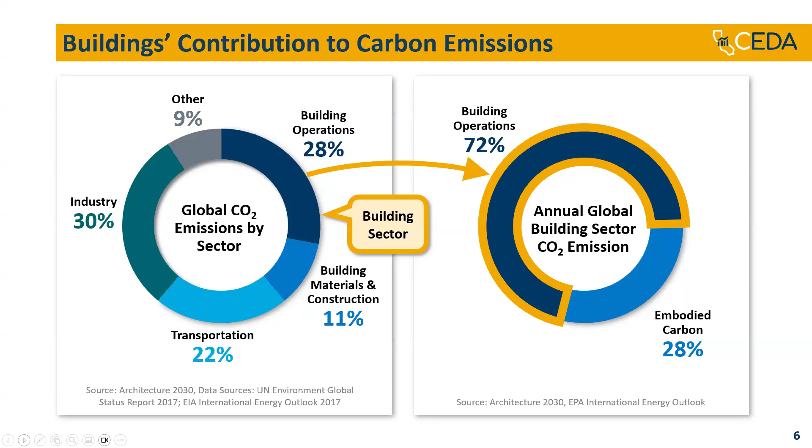So again, why are we focused on buildings with high operating carbon? Well, these buildings will unfortunately slow the transition to clean energy. They're far less adaptable and resilient, causing faster depreciation and decreased profits. They're vulnerable to future policy changes, and they have a greater potential to someday become a stranded asset.

So cities are starting to face a number of significant challenges as they try to improve energy efficiency and implement new sustainability measures. Budget constraints often limit their ability to invest in those new technologies or upgrade aging infrastructure. Many cities also struggle with capacity issues. There's simply not enough staff or resources to manage large-scale projects. Aging building stock presents yet another hurdle, as retrofitting older buildings can be complex and costly.

And then finally, cities are forced to juggle competing priorities, trying to balance sustainability with other pressing needs like public safety, transportation, and community services. These barriers can at times slow the progress, but understanding them is that first step towards finding a practical solution.

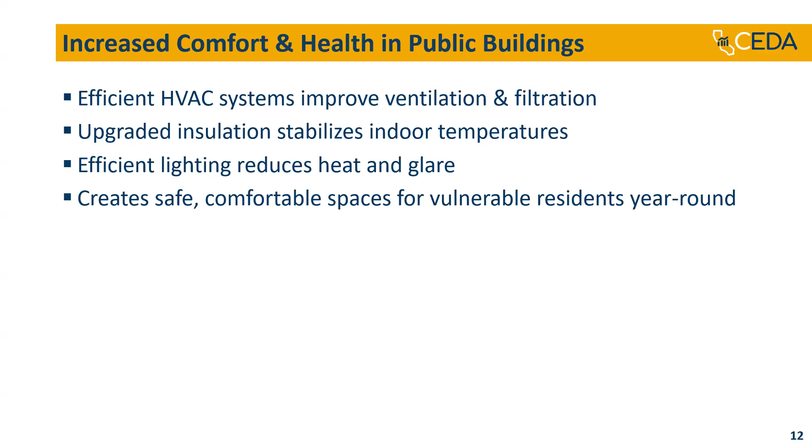In fact, energy efficiency is a leading source of job growth nationally. In 2023, over 2.3 million workers were employed in that particular sector, with nearly 75,000 new jobs being added. Again, fastest growth of any U.S. energy technology subsector since 2018.

Construction jobs related to efficient buildings grew the fastest, highlighting how critical these roles are for reducing energy use and improving our built environment. Workforce training and certifications help ensure that these jobs not only provide career advancement but also lead to those high quality, healthier buildings and infrastructure. This means supporting local energy efficiency projects is a direct way to help foster that sustainable economic development and help to build that skilled workforce for the future.

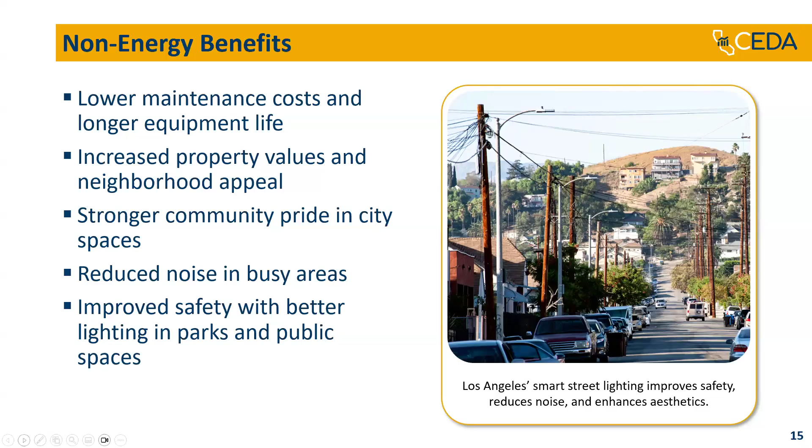So we're moving from why energy efficiency matters to why cities must act now, if you will. Save your city from future cost burdens and compliance risks by trying to engage today. Policy pressure is starting to mount. California's clean energy policies and building codes are, as we all know, getting very tight. Efficiency paired with electrification is not optional. It's in the pipeline as the norm. So energy efficiency makes electrification doable by reducing that demand first. Electrification upgrades help to avoid expensive capacity investments and help to ensure grid stability.

So the cost of climate inaction is already enormous. Since 1980, weather and climate disasters have caused over 2.2 trillion in losses nationwide, with about 765 billion in damages recorded from 2017 to 2021 alone. Now, these events obviously disrupt city infrastructure, buildings, and services. So energy efficiency measures can help reduce the strain on those critical systems, again lowering energy costs, but also increasing the resiliency of buildings and public facilities.

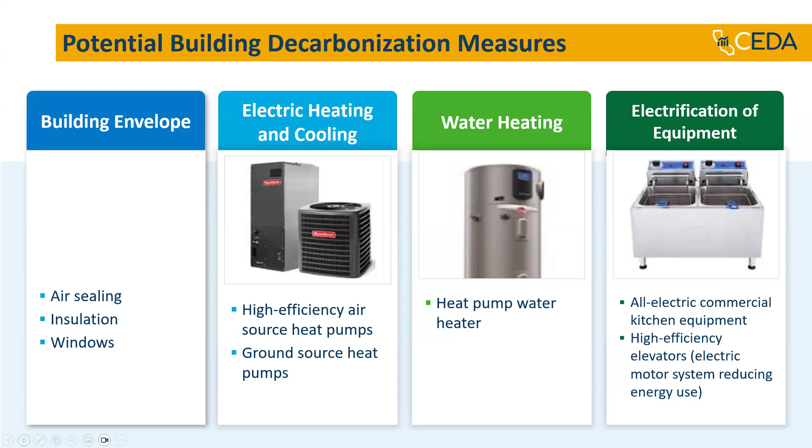But how do we know which measures will have the most decarbonization impact? You can actually accomplish this with what's called energy modeling, which again is a free service through our program, the CEDA program. We can show you which measures will have the greatest impact on decarbonization, and also show the return on investment for some of those measures. So you'll get that if you participate in the CEDA program. It's complimentary.

Next, let's look at the building envelope. Some measures that we can improve on are very common. Insulation, also improve on the air sealing, glazing, and also ensure that the windows are placed properly for both maximizing cooling and or for shading.

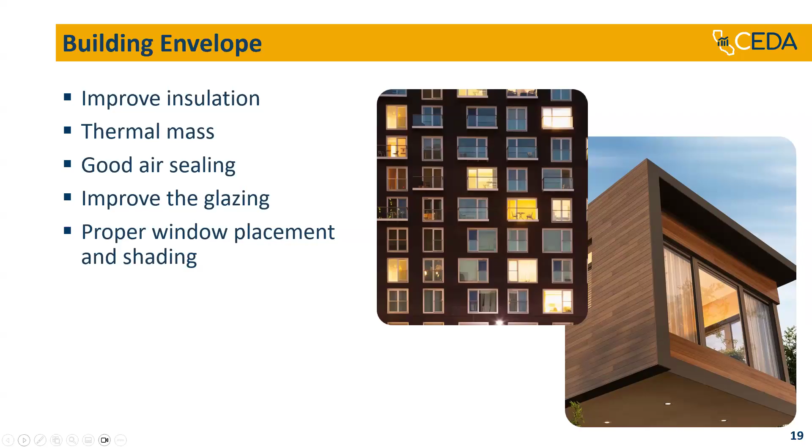As we shift our focus from architectural design to the mechanical aspects of a building system, let's dive into a significant transformation in heating technology. It's the transition, as we've all probably heard in the state of California, from gas heating to heat pumps. And understanding why this shift matters is crucial for both environmental sustainability and energy efficiency. The shift from gas heating to heat pumps is more than just a trend. It's a crucial step in addressing the never-ending climate change.

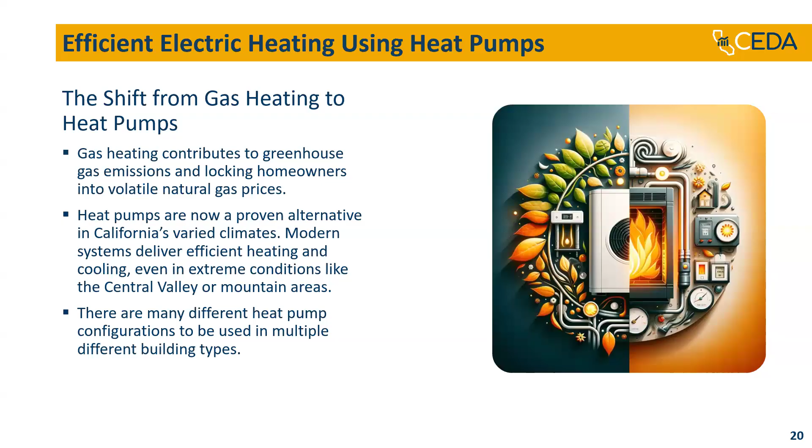Heat pumps are a highly efficient system that transfer heat rather than generate it through combustion, which means they use less energy compared to traditional gas heaters. This efficiency translates into both lower energy bills and a significant reduction in greenhouse gas emissions. Thanks to some pretty cool breakthroughs in heat pump technologies, these systems are really starting to take off and really starting to shine, even in some of those chilly, cold climates where you think they might struggle.

So imagine you're considering a heat pump for your building, intrigued by its energy efficiency, environmental benefits, but wary of the challenges, the cost, or again, performance in cold weather, or the electrical usage. Fear not, because there are actually ways to smooth out these bumps in the road. First off, let's talk about cost mitigation. The initial investment, yes, can be a hurdle, but there's a silver lining. Many regions, including programs such as ours, offer incentives and rebates to make heat pumps more affordable. Federal programs and local utility rebate programs such as CEDA can help to significantly reduce your upfront costs.

Another option is financing, which allows you to spread this cost out over time with more manageable monthly payments, making the investment more accessible. And when it comes to improving performance in cold temperatures, advanced technology is now our ally. Modern cold climate heat pumps are designed to operate efficiently, even in frigid temperatures, ensuring your building is always going to stay comfortable, even when it's icy outside. And if it gets exceptionally cold, supplemental heating can be your backup, kicking in to keep the warmth consistent without overwhelming your heat pump system.

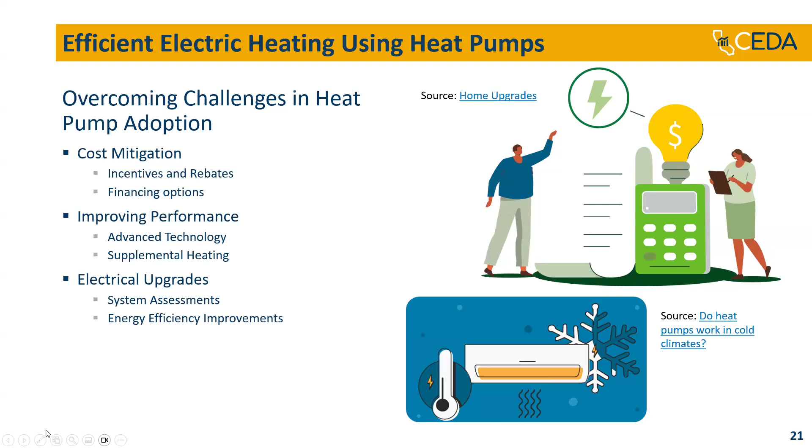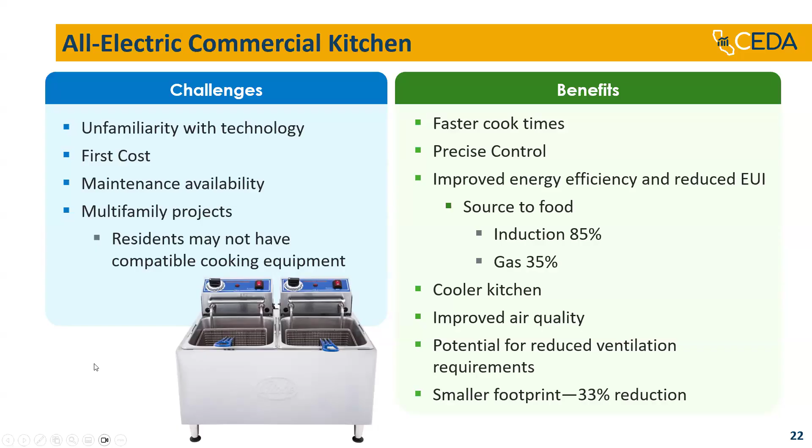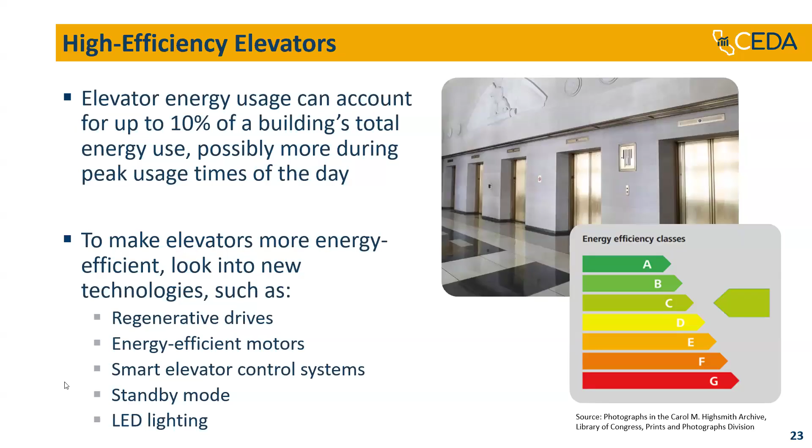There's also advanced controls. We're really looking at strategies across the three main areas. On the HVAC side, building automation systems and smart thermostats help ensure heating and cooling only run when they're needed. Again, helping with that duck curve we mentioned earlier. Demand controlled ventilation adjusts outside air based on occupancy, improving air quality while cutting waste.

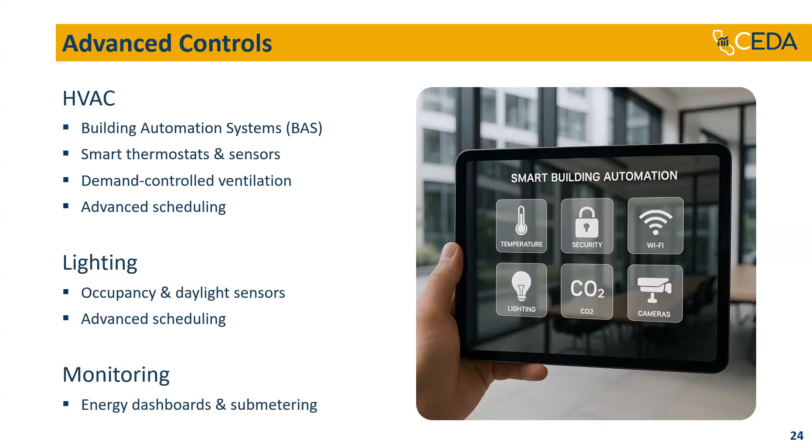For lighting, occupancy and daylight sensors help to reduce unnecessary energy by turning off lights when spaces aren't being used, or dimming when natural light is available. And then finally, monitoring and verification tools like dashboards and sub-meters help to give building operators those real-time insights. Together, these strategies help to optimize energy use, they reduce waste, and provide the data needed to help back up those savings.

So far, we've looked at why energy efficiency is important for cities and the strategies that can help reduce energy use and carbon emissions. Next, we'll focus on some practical approaches for cities to move forward: how to take these ideas and translate them into action for their buildings and their communities.

So effective planning starts with defining clear goals, whether that's reducing carbon, lowering your energy costs, or improving resiliency. Once goals are set, it's important to understand the baseline, the building stock, operations, and context, and evaluating strategies through energy modeling or comparative analysis helps cities see which measures are most effective.

Prioritizing ensures that the most impactful actions are the ones that are addressed first. Typically, energy efficiency measures followed by electrification or renewable energy. Finally, committing to implementation through policy, funding, or partnerships helps ensure that the actual planning is going to lead to real results.

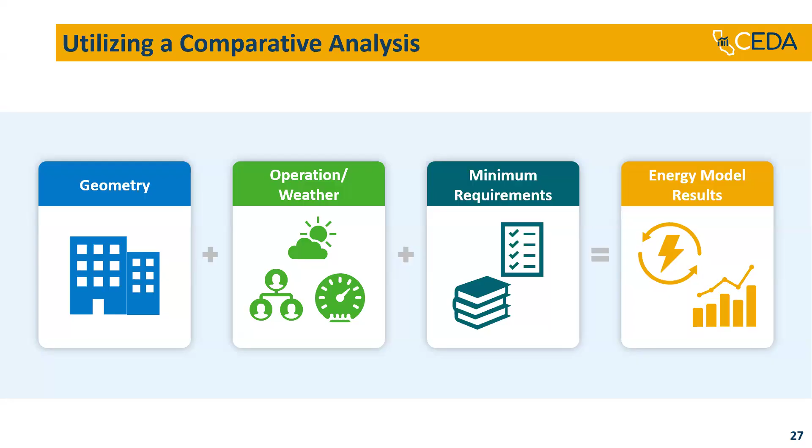In fact, as one example of this, we have made many cities aware of our program, and they're now starting to pitch it to developers that come to their planning departments, making them aware of this complementary program that is available to them. I think Berkeley now has this on their website, in fact.

So CEDA can help to reduce those upfront costs and guide projects toward energy efficiency strategies. These approaches help to scale impact across the whole community, ensuring that energy savings and carbon reductions aren't limited to city-owned facilities.

So we mentioned the Piedmont Pool case study project. We're going to dive into that now and how it's beneficial for communities, plus some energy efficiency upgrades to consider. This is a real life public project that basically embodies the Build Back Better phrase.

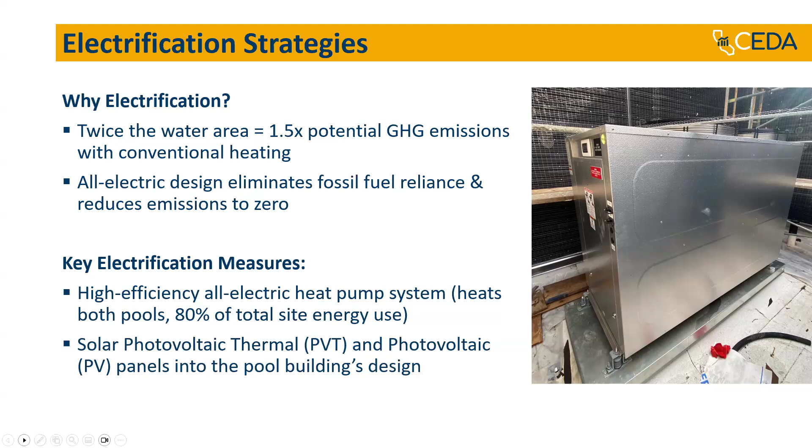So to overcome these challenges, several key solutions were implemented. Instead of focusing only on the upfront costs, the team evaluated the long-term benefits, ensuring a cost-effective solution over time. Early energy modeling helped validate the all-electric approach, showing that high efficiency heat pump systems could in fact meet the performance needs while still maintaining the sustainability goals. And again, this is in fact a free service through the CEDA program.

Engaging the public early and consistently helped build trust and ensure that the project moved forward smoothly. And by remaining flexible, the team was able to navigate those unexpected expenses while still meeting their sustainability and budget goals.

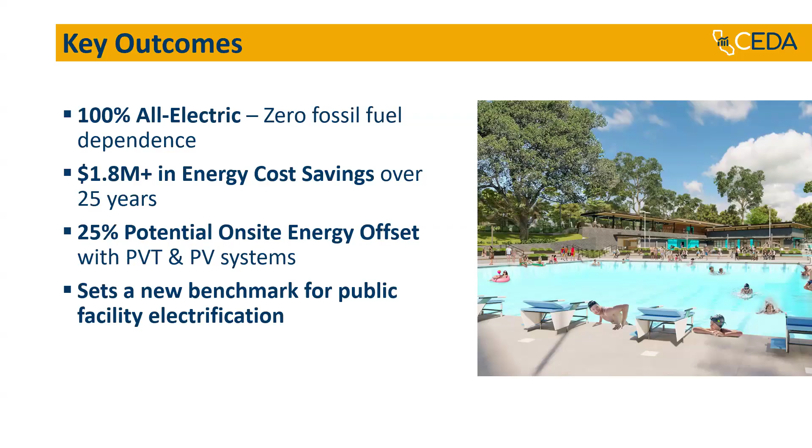Eliminating fossil fuels improves local air quality and creates a healthier environment, especially important for youth, seniors, and vulnerable populations. The community benefits from a modern, efficient facility, ensuring equitable access to public infrastructure while lowering long-term operational costs. We have a lot of developers who focus purely on the upfront cost without looking at the long-term benefits, and the CEDA program will definitely help to highlight those long-term gains.

This project also aligns directly with their climate action plan, helping the city to meet their goals. Lessons learned here can be applied to other cities looking to scale up electrification and trying to achieve their sustainability goals.

And real quick, let's look at some conclusions and takeaways. Although energy efficiency upgrades might pose a bit of a daunting application, there are many reasons that they are important to consider, whether it's creating a cleaner, more resilient city, saving cities money by lowering energy costs, or implementing efficiency measures to help meet the new state standards or local sustainability goals. Real world projects are already implementing these efficiency measures, such as the Piedmont case, and they're going to support sustainable infrastructure that benefits all of us.